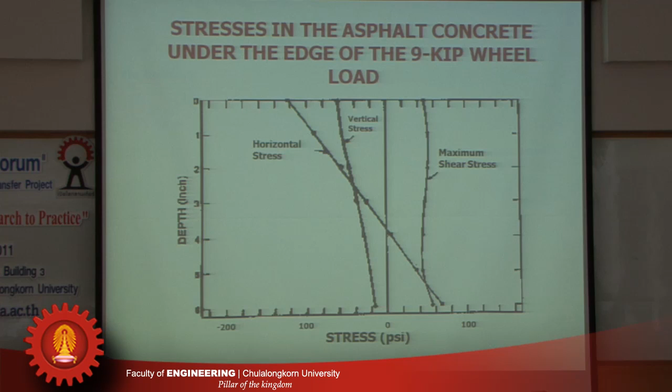And it could crack at the bottom, and the crack would propagate upward. This type of crack is called bottom-up cracking.

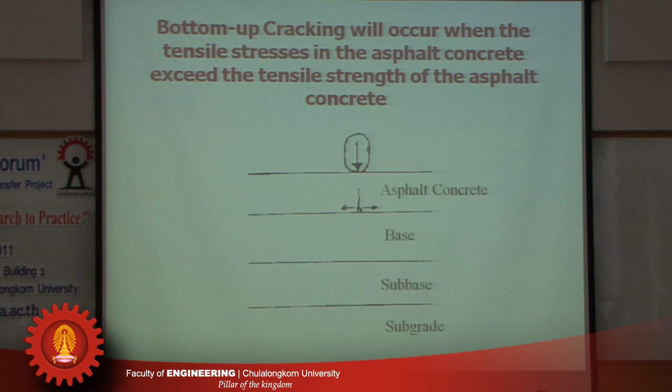Well, if the stress at the top is excessive, cracking may start at the top, and we may have top-down cracking. However, when you do the analysis in the traditional manner, you find that we really don't have tensile stress at the top. If you put a load at the top, you only have compressive stress there, not tensile stress.

But in real life, we see a lot of top-down cracking. Why is that? Well, quite a few researchers have studied this problem, and they found out that when a wheel goes over the pavement, there's tire-pavement interaction. There's friction in the tire, and it causes some horizontal stress, which could cause cracking. But those stresses are limited to the very top layer, they don't go down, and it's caused by tensile stresses at the top.

So can we predict this type of cracking by comparing the tensile strength of the material? If we put an asphalt mixture with high tensile strength, is it going to solve this problem?

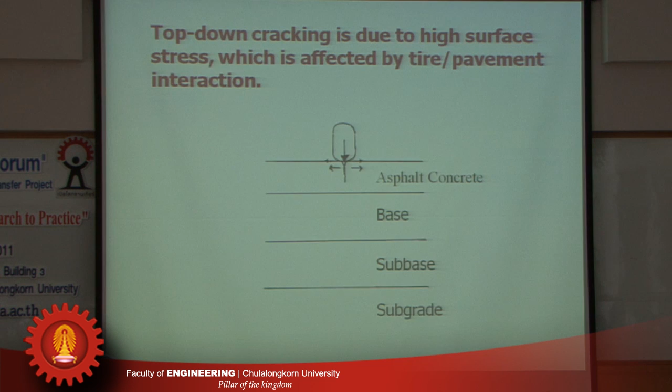Well, my colleague, Dr. Roque, which Dr. Bunchai had studied under, and actually Dr. Bunchai had contributed to the result I'm going to present, studied the problem. He looked at pavements with top-down cracking and pavements with no top-down cracking, took cores, and measured the tensile strength of the mixture to see if there's any relationship. Surprisingly, there is no relationship.

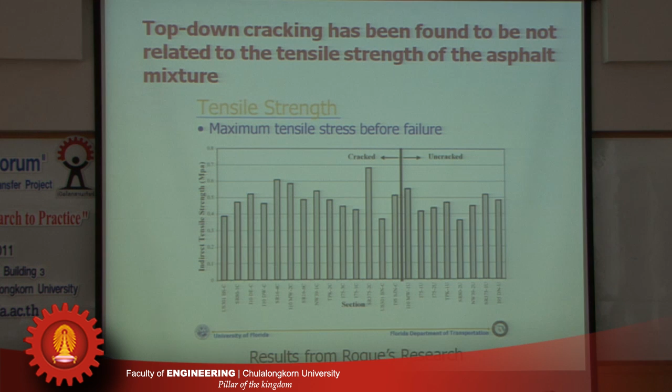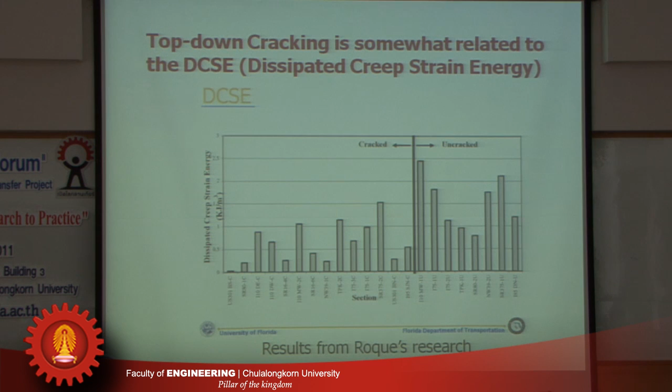So what might be related to its resistance to top-down cracking? Well, what he found is that this property, called the dissipated creep strain energy, which I'll explain how it's obtained, is also related to fracture energy. If a mixture has high dissipated creep strain energy or high fracture energy, that mixture has much less tendency to have top-down cracking.

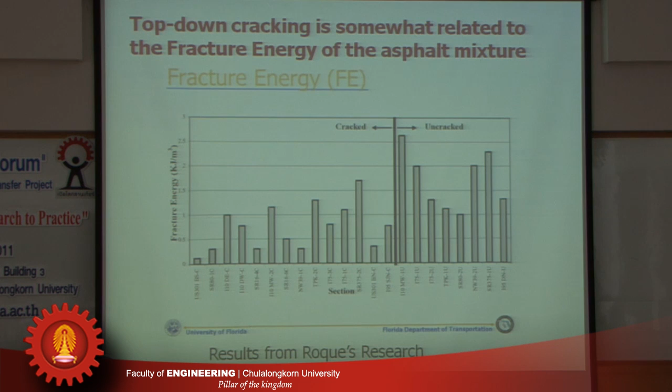How is this determined? If you run an indirect tensile strength test, and if it's instrumented properly so that we can measure the strain, then we can plot stress versus strain. So essentially you get a stress-strain plot, and you calculate the area underneath the plot all the way to failure. This area gives us the fracture energy. A mixture with high fracture energy would be less likely to have top-down cracking.

And if you take this and take out the triangular area representing the elastic energy—basically you take the initial slope, draw a line from the failure point down, and this triangular area is the elastic energy—and subtract the elastic energy from the fracture energy, then you have the DCSE. According to his research results, a mixture with a high DCSE would have a low likelihood of top-down cracking.

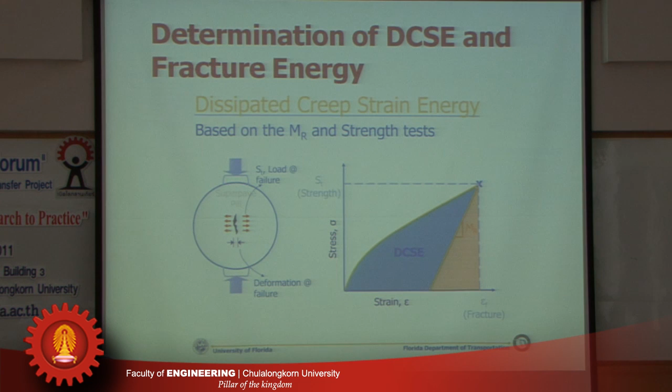The question is, how much should that be? He wanted to find the minimum amount. What he did was run crack propagation tests, making a specimen and measuring the number of cycles it takes to propagate the crack a certain length. I think Dr. Bunchai did some work in this area and produced a very useful result.

What he found is that if he ran this test and it took a very high number of repetitions for the crack to propagate 2 inches, that mixture would have a very low likelihood of top-down cracking. That number seems to be about 6,000 repetitions. So if it takes more than 6,000 repetitions for the crack to propagate 2 inches, that mixture is resistant to top-down cracking.

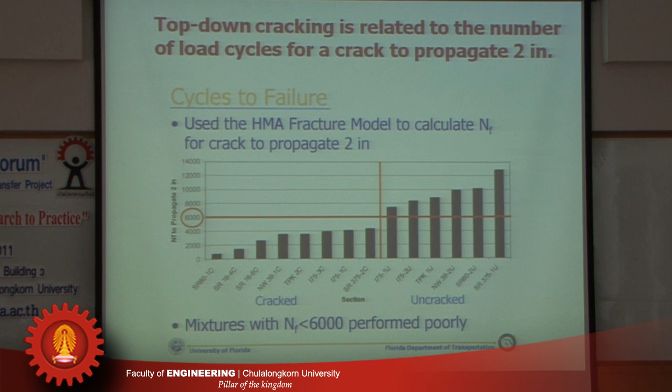And how much is that? Okay, how much is the DCSE? According to his calculation, it could be expressed by this equation.

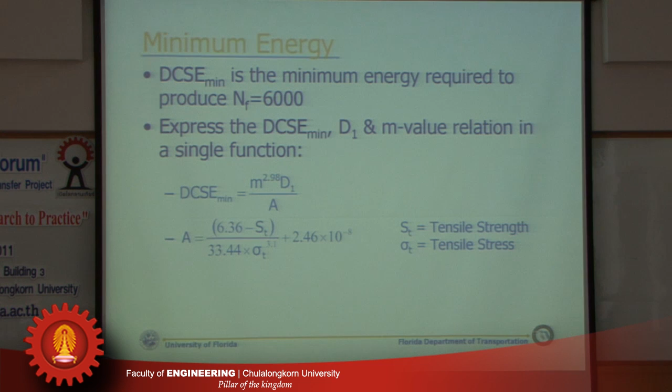Okay, so this shows the detail of how the minimum amount of DCSE could be computed from the indirect tensile strength test.

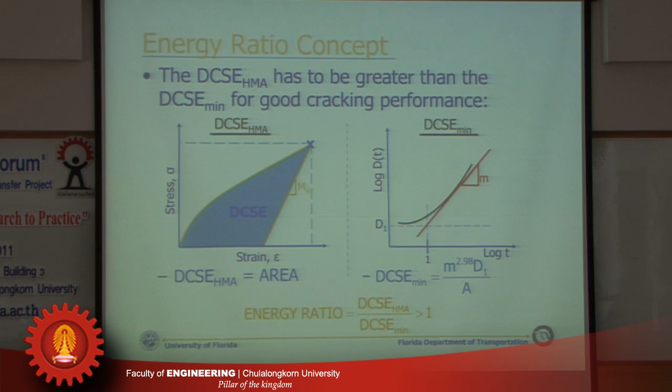Dr. Roque suggests these two criteria, in order not to have high tendency for top-down cracking: the DCSE has to be higher than the minimum required DCSE. This ratio, ER, is the ratio of the DCSE divided by the minimum DCSE, and it has to be greater than 1. This means the DCSE has to be greater than the minimum DCSE, and the formula for the minimum DCSE was given in the previous slide.

Also, the DCSE needs to have a minimum amount, which is 0.75. So basically, in his recommended method, you would test the mixture to make sure it would have a DCSE greater than the minimum DCSE, and also that DCSE has to be at least greater than 0.75. With this criteria, we can predict whether or not we may have likelihood for top-down cracking. And the predicted result matches very well with the observed result.

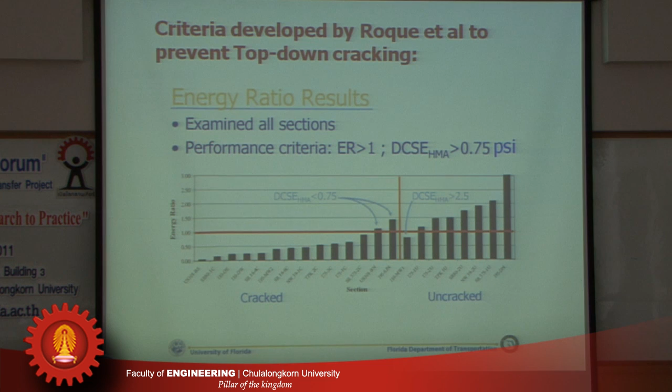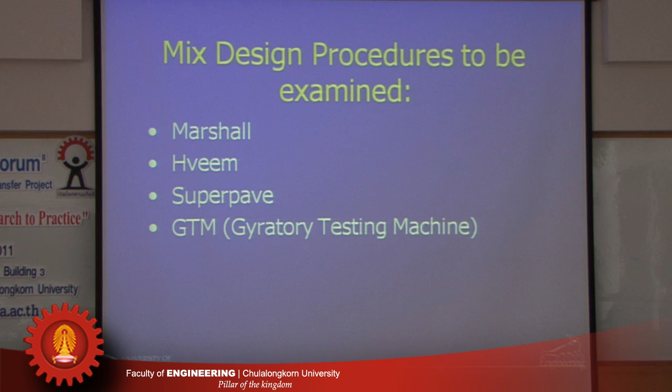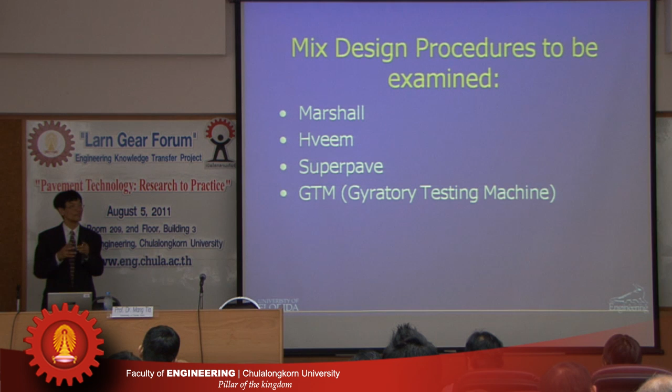So how do we design asphalt mixtures which would not have these kinds of problems, like top-down cracking, bottom-up cracking, rutting, and so forth? How do we design an asphalt mixture? We usually use an asphalt mixture design method. There are different methods.

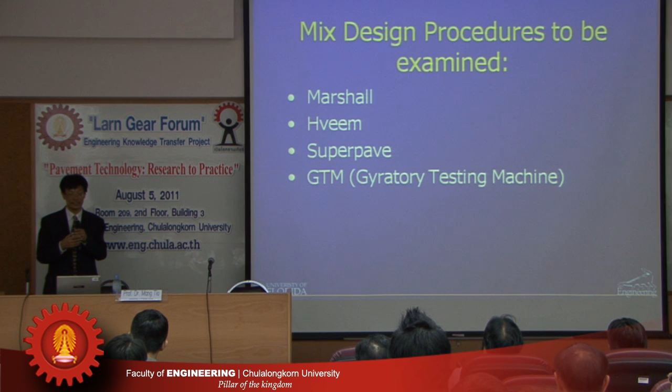I believe in Thailand you use the Marshall mix design method. There could be other methods where you basically design a mixture, and when you get an optimum mixture, you hope that it would perform really well. I want to cover the fundamentals of asphalt mixture design here, briefly covering four methods: Marshall, Hveem, Superpave, and also the GTM method.

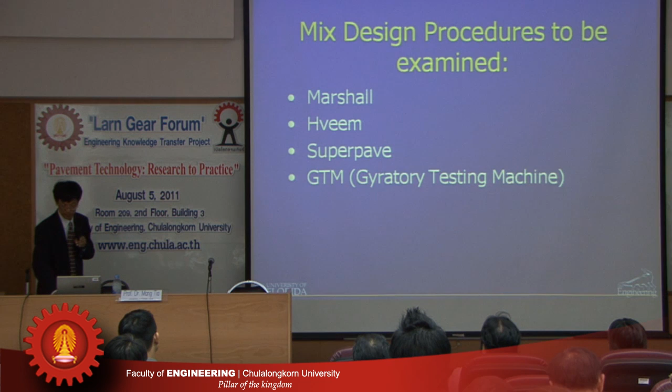Well, what is an asphalt mixture design procedure? Basically, we select the aggregate that we want to use. We select an asphalt that we want to use, and sometimes we may want to add some additive to it.

Then we make the mixtures and test them at different asphalt content, testing the asphalt mixture at various proportioning of the ingredients. We put in different binder content, and then we select the optimum mix design that would give the best performance in service. So basically, that's what we do in a mix design method.

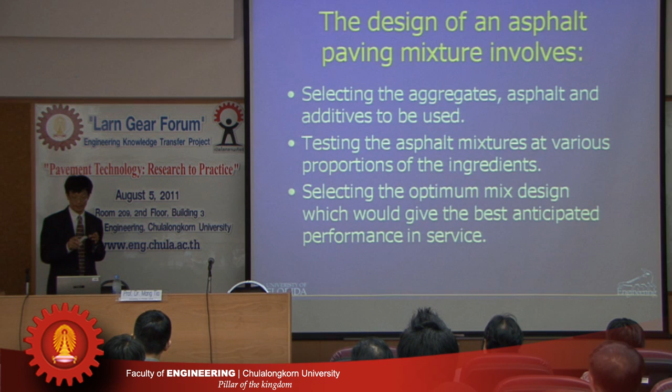So how do we do that? The mixture usually would be prepared, compacted to close to the field condition. Like in the Marshall test, you compact the specimens, trying to compact it to a condition close to the field condition.

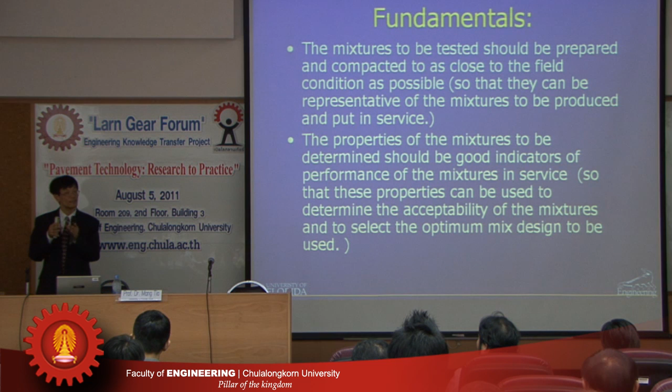And then you have the compacted mixture, and you evaluate its properties to determine whether or not it will perform. These properties can be used to determine the acceptability of the mixtures and to select the optimum mix design. So we make specimens, test them, decide which one would most likely perform well, and we pick the one that would work.

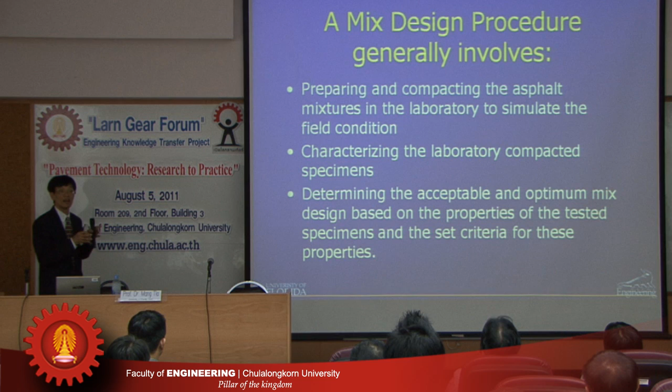So the method involves compacting the specimens, preparing and compacting the asphalt mixtures in the laboratory to simulate the field condition. Then we characterize the laboratory compacted specimens. Characterize means running tests to measure its properties, and we determine the best one based on the criteria we set out from the beginning.

Okay, so the fundamentals are quite simple, right? You compact it to field condition, then you evaluate it, but different methods are different. They're different in the compaction method, so the different design methods generally differ from one another by the following things: they use different equipment and methods to prepare and compact the mixture. In the Marshall method, you use one type of compaction; in other methods, we use different compaction methods. Then if we use different methods, the properties to be measured are also different, and the criteria used to select them are also different.

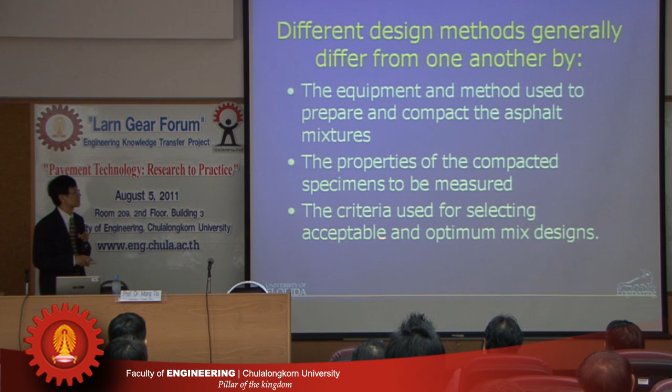Okay, so now that we understand the fundamentals, we want to look at these four mix design methods to see whether or not there are any merits, or whether or not there might be some problems.

Marshall mix design method was developed by Bruce Marshall, who used to work at the Mississippi Highway Department. This method was not popular until the Second World War. During the war, there was a need to design asphalt mixture for airport runways fairly quickly, within a day's time, and so it was adopted and was a very successful method. After the war, a lot of highway departments adopted the Marshall mix design method, which was the most popular mix design method in the United States until Superpave was adopted. But it's still the most commonly used method in the world.

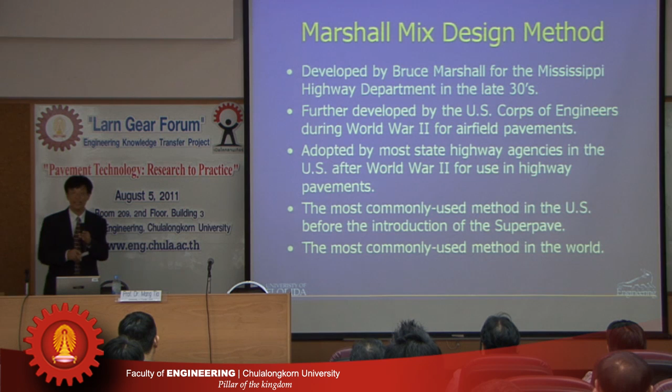Well, are there any problems with the Marshall mix design method? How does it compact the specimen? One of the key things in the mix design method is that we need to compact the specimen so that it would be very close to the actual material in the field. Does it really simulate the actual field condition? It compacts by dropping a hammer of 4.5 kilogram weight from a height of 18 inches, which is 457 mm. You drop a certain number of blows, and you turn the specimen around.

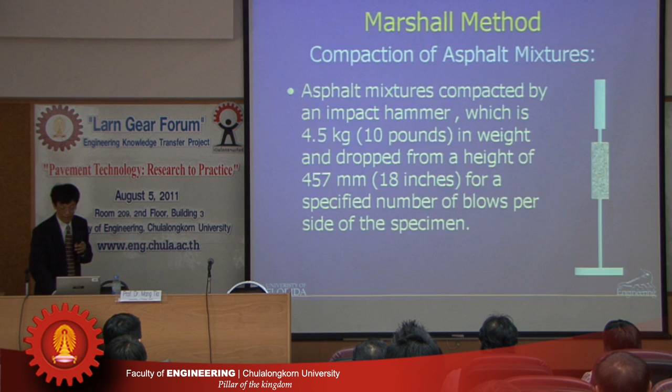You drop a number of blows, and how many blows? Well, it's supposed to simulate actual conditions, so if you have a lot of traffic, you need to compact more so that it simulates the actual condition. These are typically used: if you want to simulate heavy traffic condition, you could compact 75 blows on each side. Well, is there any problem with this?

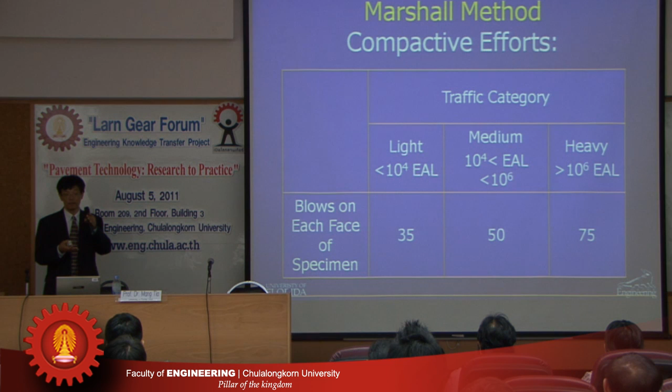Well, it's found that if you compact too much, if you want to simulate a really dense mixture, we may have a problem. Those of you who have experience with the Marshall compaction method have found out that if you really want to simulate a high compactive effort, we may have a problem with the aggregate—that's actually the second issue. The aggregate tends to get crushed at a high compaction level. In the field they don't get crushed; with a higher number of roller compactions, the mixture just gets compacted more. But if you try to do that in the lab, the aggregate gets crushed. Also, if you take a core from the field and compare it to the Marshall specimens and look at the orientation of the aggregate, they are not the same. So obviously, the Marshall compacted specimen does not simulate field condition very well.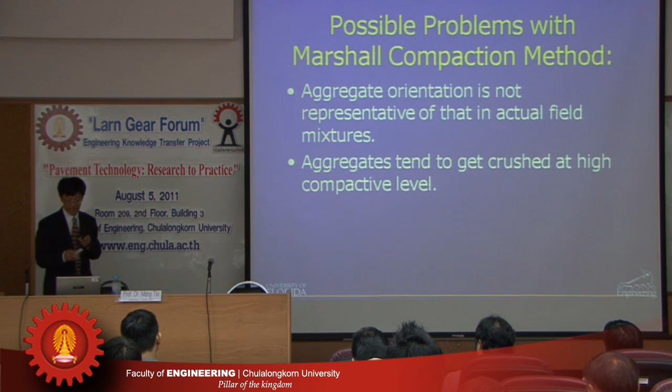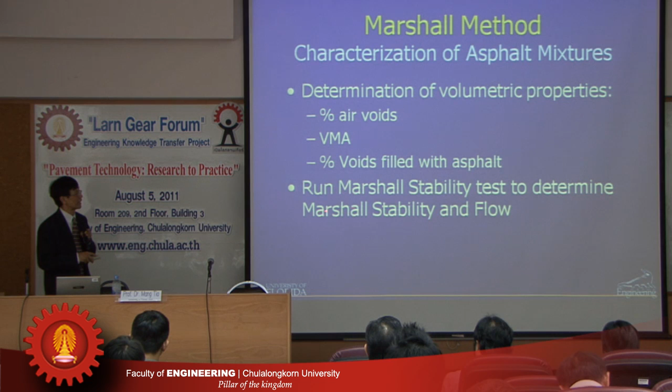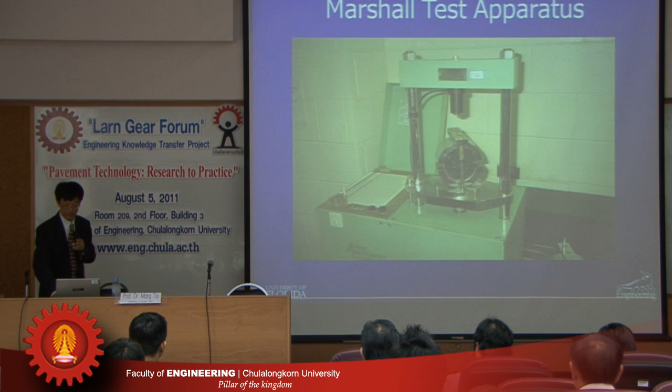Okay, so that is one problem. In the Marshall method, we measure these properties: air voids, voids in mineral aggregate, percent voids filled with asphalt. These are volumetric properties—it measures the proportion of asphalt, air, and solids in the compacted mixture. We also run the Marshall stability test, from which we get the Marshall stability and also the Marshall flow. This is a Marshall test apparatus; those of you who have run the test are familiar with this. You run the test at 60 degrees C, and we plot load versus vertical deformation. The maximum load before failure is known as the Marshall stability, and the Marshall flow is the vertical deformation when we reach the maximum load.

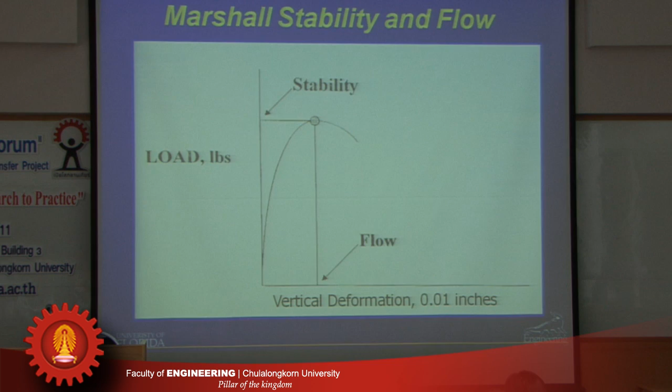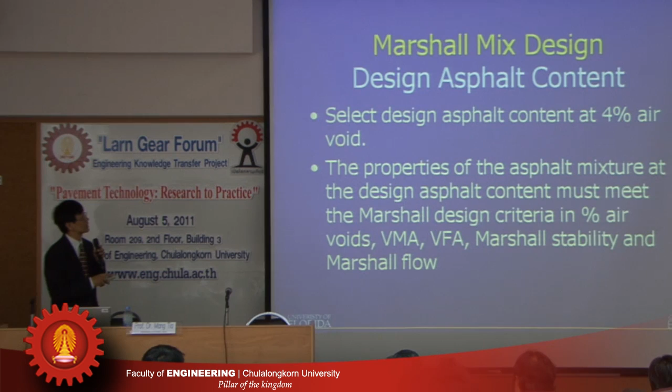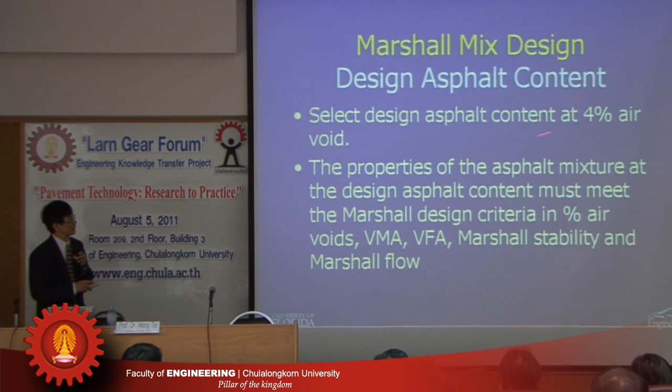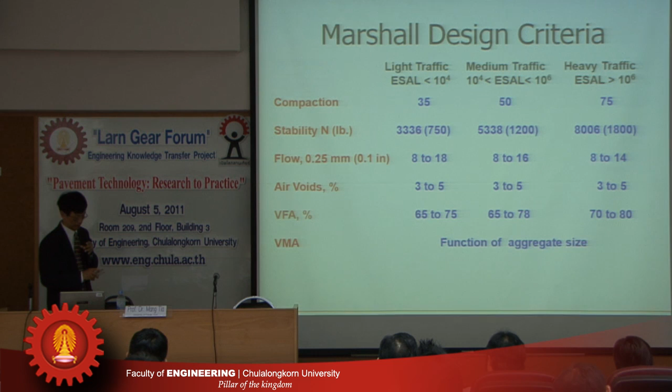And what is considered the optimum? The optimum asphalt content is picked when the air content is 4%. At 4%, that's where the optimum asphalt content is, and at that asphalt content, we look at all the other properties, and they need to meet all the criteria as shown here. Basically, the criteria includes Marshall stability, the flow, and then also these three properties: air voids, voids filled with asphalt, and VMA, that's voids in mineral aggregates.